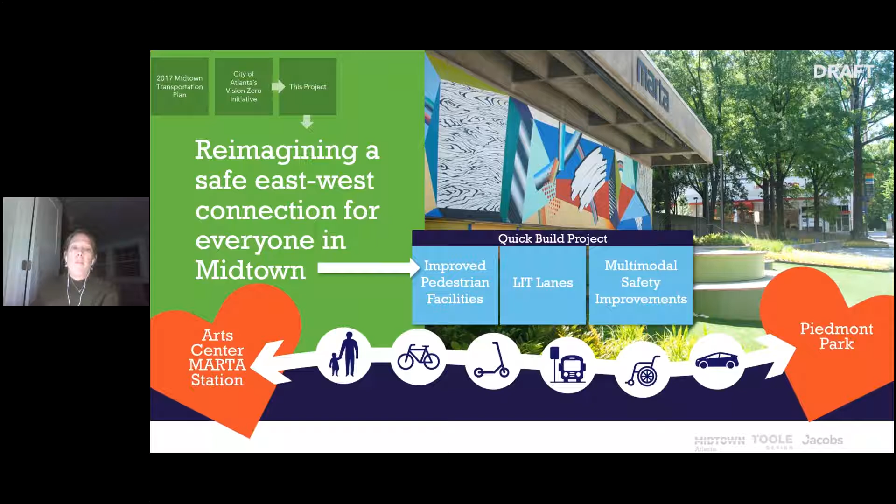Earlier this year, we were lucky enough for the City of Atlanta to adopt the Vision Zero legislation, which Carrie Byrne with the city will speak about momentarily. That is really to improve road safety, including lowering vehicle travel speeds in the city. So all that brings us to the 15th Street project. In short, this project aims to improve safety for all users, slow vehicle speeds, reduce vehicular congestion, and provide dedicated space for all modes.

And with that, I'm going to turn it over to Carrie Byrne. She is with the City of Atlanta, she's the Chief Bicycle Officer.

Hi, thank you, good evening. Thank you Julie and Addie. My name is Carrie Byrne, I'm the Chief Bicycle Officer, as Addie mentioned, with the Atlanta Department of Transportation. To give you some context on where the city is coming from as a newly formed Department of Transportation, safety is a critical focus of all of our transportation work. Data shows that traffic death rates in Atlanta are unacceptably high.

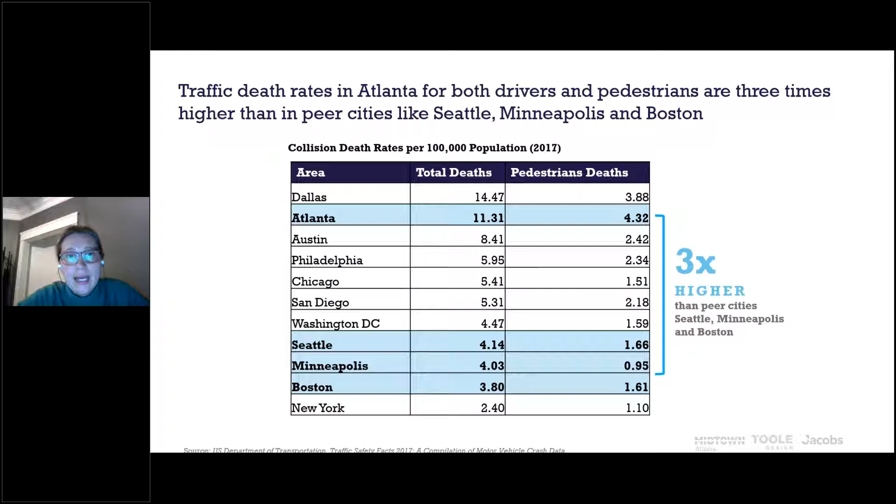In 2019, 73 people died trying to get where they were going. This is not something we should or need to accept as a city or as a department. Each of these is a tragic incident, and we need to strive to eliminate these.

With the recent creation of ATL DOT, our Atlanta Department of Transportation, and the development of the One Atlanta Strategic Transportation Plan, ATL DOT is committed to improving safety and making walking and biking a safer and more pleasant option for more Atlantans, all prioritizing safety, equity, and mobility.

In April, the City of Atlanta unanimously adopted a Vision Zero policy to eliminate traffic deaths and serious injuries. Along with that was legislation to lower speed limits on many of our city streets.

With that policy, Atlanta has joined 43 cities nationally who have adopted Vision Zero policies, peer cities that have implemented Vision Zero action plans that have shown meaningful reductions in traffic deaths. ATL DOT recently was awarded funding for creation of a Vision Zero action plan, and we're excited to get started on that work.

The 2019 Midtown Alliance Community Survey shows that the Midtown community members already support a lot of these goals around making and investing in a more walkable and bikeable community.

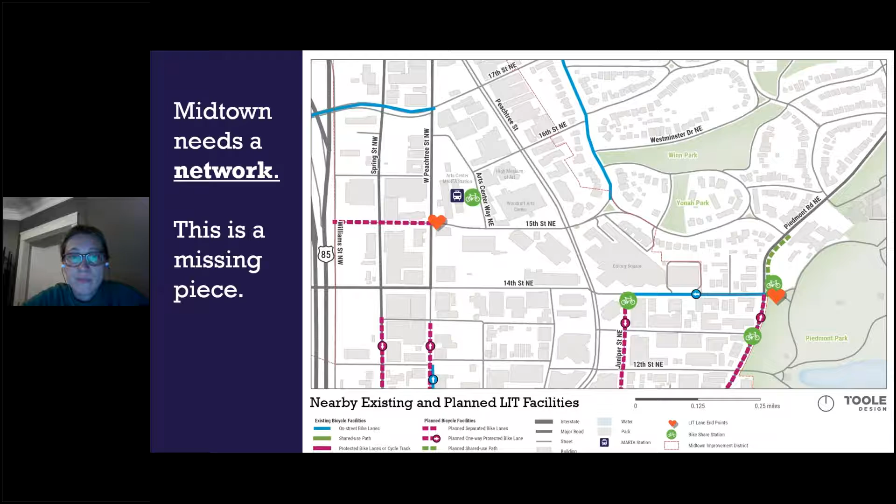To do that, we need to create a network. We have a series of bike lanes throughout Midtown and a growing investment, but in order to create a system that is bikeable and accessible to more users, we need to connect that network. This project that we're going to talk about tonight provides a key connection in that network.

And we're working on a lot of things. ATL DOT and Midtown Alliance have several projects that focus on safety improvements and expanding the bike network throughout Midtown. We're always excited to work with partners like Midtown Alliance who are able to support our transportation goals around safety, equity, and mobility while focusing on creating an expanded network that addresses safety for all users.

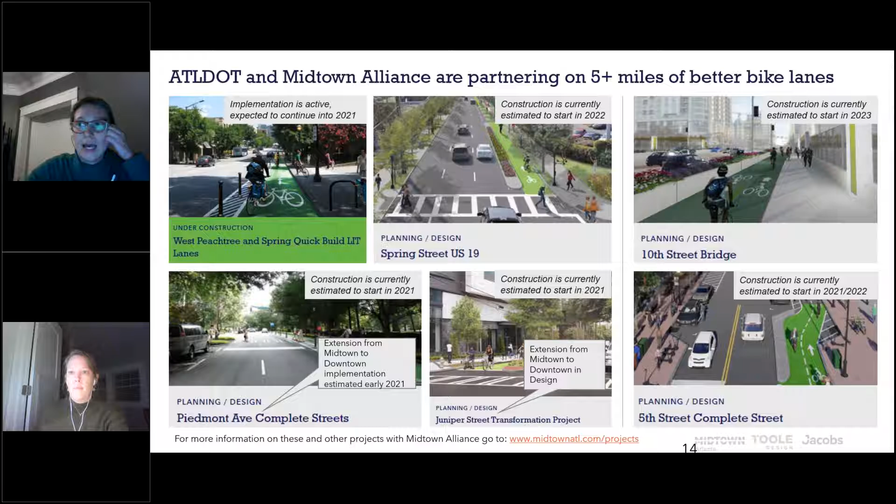I think through the conversation tonight, we'll see how looking at a bike infrastructure project can really address safety for all users of our streets, whether people are walking, biking, or driving. And with that, I think I'm turning it back to Addie to talk about the specifics of the project.

Great, thanks, Carrie. So this project aims to provide that east-west connection between the Arts Center MARTA Station and the Piedmont Park entrance at 14th Street, connecting to the Beltline.

As part of our initial focus area, while the 15th Street corridor was identified in that 2017 plan, we wanted to look at the alternatives both north and south and see if there was any viability in those. So we looked at the 14th Street corridor, we looked at 15th, and then we looked at 15th with a 16th Street leg that comes down to Arts Center Way. Megan McMullen will be speaking about that analysis in a moment.

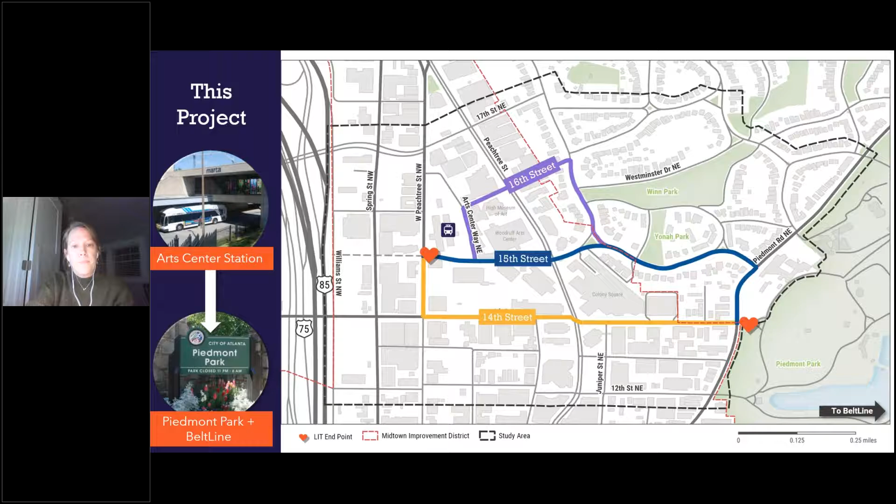As part of this effort, we're really looking at an agile infrastructure approach that really aims to reduce the amount of pre-construction. Midtown Alliance has a great partnership with the City of Atlanta, and so they're working closely with us on this effort. There's close partnerships we have.

We're also really focused on the entire corridor of providing these changes within curb to curb. So we really want to minimize acquisitions and curb and gutter. We're also looking at low-cost materials that can be easily upgraded as funding becomes available.

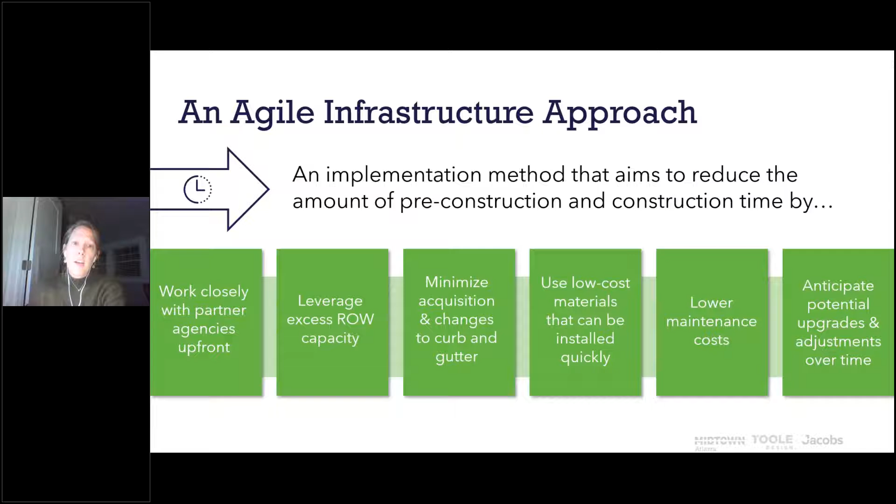So we began this project right at the beginning of April, and then since that time we have been going out to the community and stakeholders and doing a deep dive into the existing conditions. Currently we're in round 2 of community engagement.

From this effort, we will move on to schematic design. Once schematic design is complete, we will hand our work over to Midtown Alliance, where they will begin looking at how to actually secure funding. As of today, there is no funding allocated for this project, so there's a lot of steps that need to happen between the completion of this work and implementation.

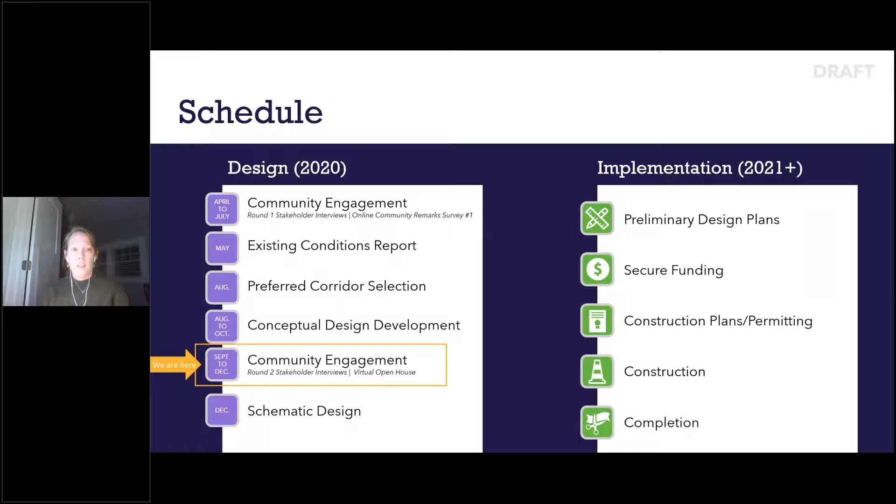As I mentioned earlier, we've done community outreach. We've spoken to a lot of key stakeholders in 2 rounds along the corridor. There are various key property owners that really have influence along the corridor. We had the community remarks online survey, and currently we're with the virtual open house. This is not the last time that you'll be able to weigh in on this project as it moves forward. There will be future phases of engagement. And with that, I'm going to turn it over to Megan McMullen, my colleague.

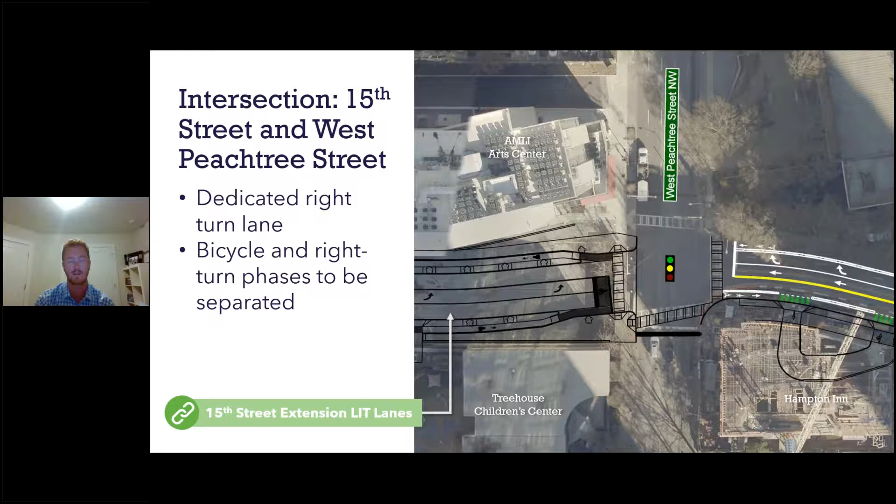And then I think we can get onto Arts Center Way next. Here, the existing is an unsignalized crosswalk. So we have three crosswalks on each leg of that intersection. What we're proposing is to introduce an RRFB on that west leg, but also add in an ADA accessible ramp to the south side of that, to make that RRFB and narrow that pedestrian crossing.

So as you can see, we've got refuge on both legs of those crossings on the south side, just to narrow that crossing and reduce that distance for pedestrians, and also facilitate a northbound turn for eastbound bikes onto Arts Center Way. And you can see with those icons the movement for each of those turns and the east-west.

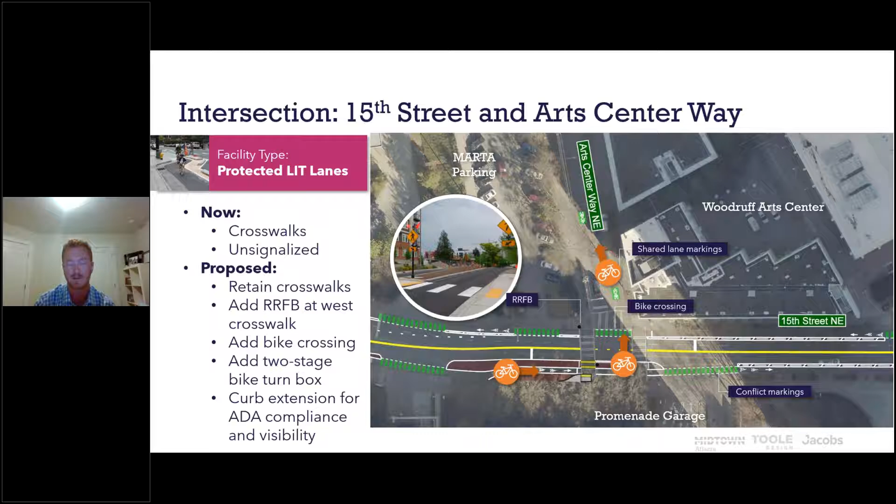So the next segment is Arts Center Way to Peachtree Street. And we've got for the westbound direction on the bike lanes, we have a MARTA bus stop, and we also on the south side have the loading bays to deal with. So the existing is one lane for eastbound and two lanes in the westbound direction.

So at the lane reallocation we're proposing, it's one lane in each direction with still the provision of a left turn lane at Peachtree Street itself. And then we've consolidated the existing loading bays to make that a little cleaner, and then also improve the sight distance as you approach the intersection for eastbound bike lane users.

And then, yeah, well, the icons to show those movements. And then also at the MARTA bus stop, we're proposing a constrained bus stop type where you have the lane itself ramp up to the bus to curb height. So we've got that shown there.

And the next intersection on that segment is one of our most constrained on the corridor, where we have pretty tight existing curb to curb width, but also some plaza. So we have some shared lane markings shown here, but we're proposing to ramp up to sidewalk level for both east-west directions as you approach the intersection, continuing to look to separate the bike lane users from the travel lanes as much as possible.

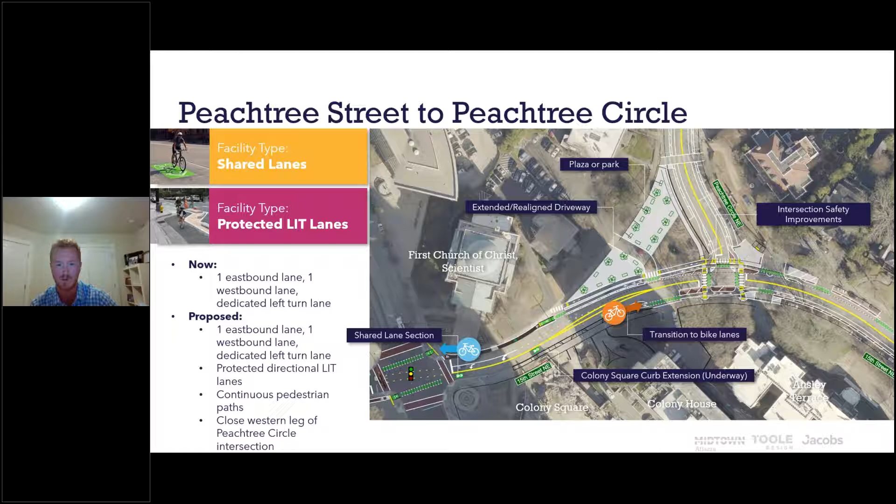The next one will zoom in more on the Peachtree Circle intersection to see that a little more clearly. We've looked at the safety data and proposed a 3-way stop and reallocating of the space on the west leg of this intersection. This is sort of an interim design, so there's a lot of potential to reallocate that space for reimagining and collaborating on coming up with something permanent in the future. This configuration also allows parking to remain along the leg of Peachtree Circle, but also realigning the driveways and adding a protected intersection and an in-street sidewalk or pedestrian lane for east-west movement. So we're really shortening that east-west movement distance for pedestrians, but also facilitating bicycle and bike lane movement north and south as well.

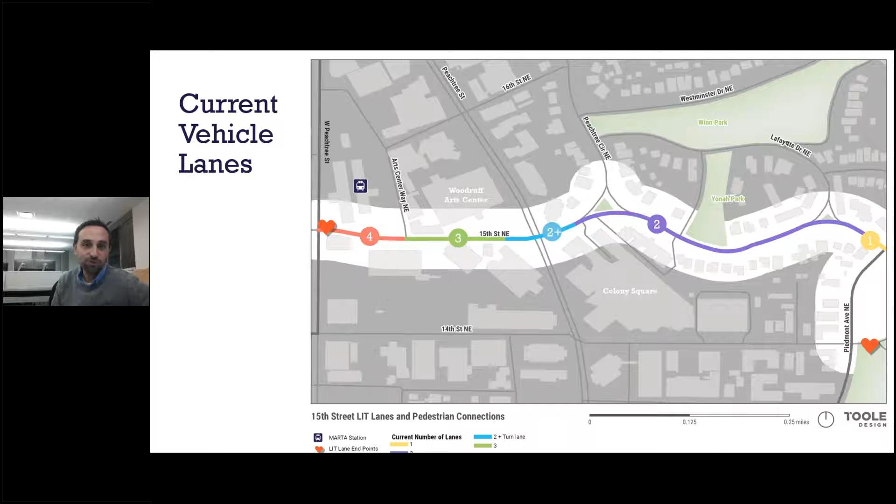The future lane configuration mostly maintains the number of lanes. As we approach West Peachtree Street, we are still maintaining 2 lanes on the 15th Street approach to West Peachtree Street, as we know that gets a little congested during the afternoon peak period. We also maintain the number of lanes going across Peachtree Street, which is another pinch point along the corridor, and we maintain those 2 travel lanes through Ansley Park.

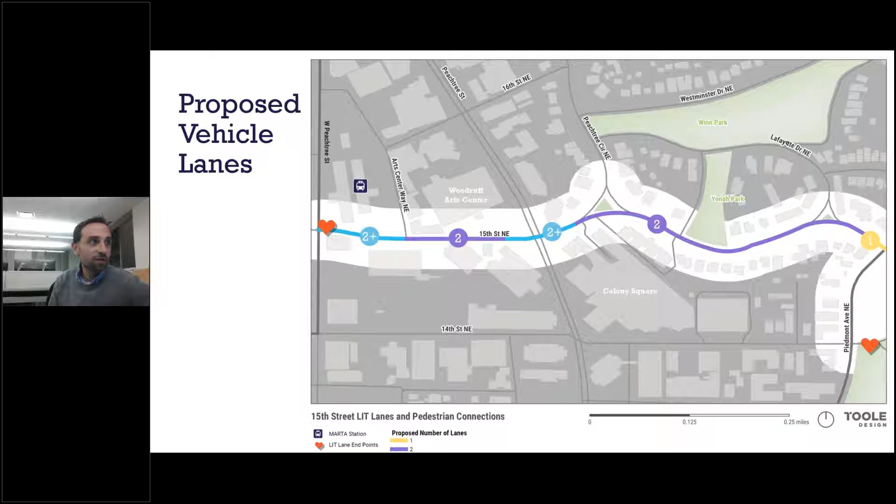Go to this slide. Here we have the most congested part of the 15th Street corridor, the Peachtree Street intersection. We understand today there's some afternoon queuing on the westbound approach, some delay. Sometimes it blocks the access points to Colony House, Hanover House, and Colony Square. Also highlighted by Megan earlier in the presentation, the Peachtree Circle intersection with 15th Street is an area that has a lot of crashes. In the years 2016 through 2018, our query indicated there were 17 crashes at this location, with 3 injuries, and 6 of those crashes were actually angle crashes, which are some serious crash types.

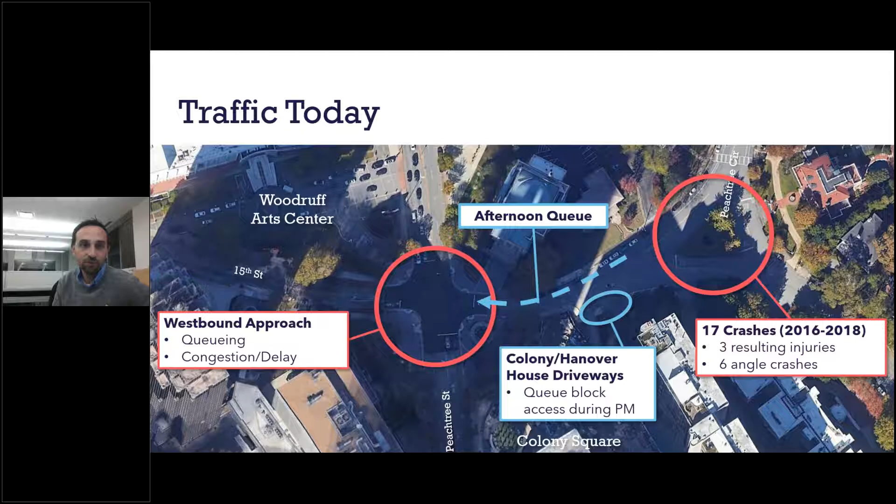Looking into the concept, how we address and mitigate some of the concerns. Crossing Peachtree Street, we're maintaining the same number of lanes, so we're not going to introduce any more pinch points or bottlenecks at this location. In fact, we've identified a way to improve traffic at this area, even though it wasn't a goal of this project, since it's a road diet design project. We identified an opportunity to add a left turn phase to improve congestion on that westbound approach, so we should expect shorter queuing as westbound left turning vehicles now have a protected movement across the intersection.

We're also introducing a three-way stop at the intersection with Peachtree Circle. The reason I pointed out there were 6 angle collisions is that it's a collision type correctable by installing an all-way stop sign. So we should expect improved safety at this intersection, not just for cyclists and pedestrians but also vehicles, and we can ensure a protected pedestrian and bicycle crossing. By shifting this intersection away from Peachtree Street, we're separating the two intersection operations, providing more space between them, which should improve safety between the two intersections as well.

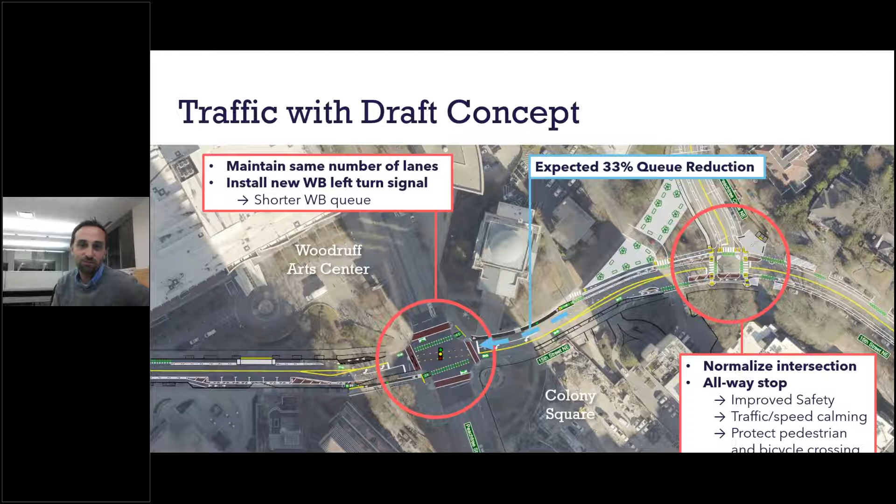Megan, were you going to discuss these slides? No, sorry Chris, I'm taking over from you.

Thanks for that. We've gone over a lot at a high level, lots to digest here, but there's no one perfect route. We understand some pull toward 14th or 16th, but after reviewing all of the options, some really clear benefits to going along 15th Street bubbled up.

Not only will we be able to connect a couple of other projects that are in the works, Piedmont and the 15th Street extension, but we're also going to create a safe designated space for cyclists and scooter riders along 15th Street. We're going to improve pedestrian safety. A simplified intersection at Peachtree Circle will really reduce the conflicts we see and improve everyone's safety.

The other thing that will really benefit this area is that right now, with such wide lanes, we see high speeds going through Ansley Park. So in addition to reducing the width of those lanes just a little bit and adding a 3-way stop, we'll be able to slow traffic just a little to make it more safe for the neighborhood.

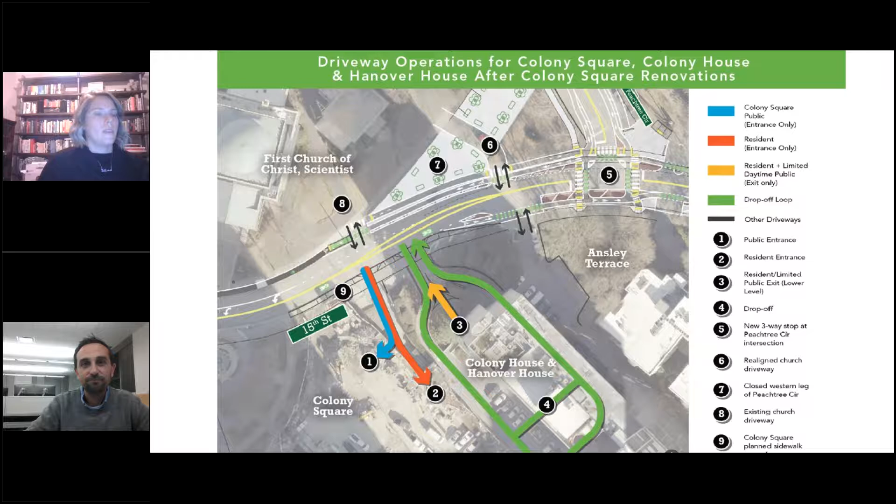Excellent, thanks Chris. I do think it might be important to mention as well that while we are trying to do everything we can to make the entrance and egress from Colony and Hanover House and Colony Square as safe as possible, we are of course limited to improvements along the right of way. So the scope of this project, we can't really change the way that traffic flows inside the building, because that is definitely beyond what we are in charge of.

So another question was, what prevents people from riding down 15th Street as it stands today, especially in terms of thinking through fund allocation.

We're really approaching a lot of these safe facilities with this 8 to 80 concept. So we want to make sure that any kind of thing that we designate as a corridor can accommodate folks across a spectrum of comforts. While of course any street in Atlanta is accessible and available to people on bikes and scooters, that doesn't necessarily mean that everybody feels safe. So in creating these projects, we are working to create corridors and connections that accommodate everybody. Whether you're someone riding with a 2-year-old on the back of your bike or a first-time rider, we want to make sure that you feel safe and separated from vehicular traffic, which is a major barrier to people using other modes of transportation besides cars.

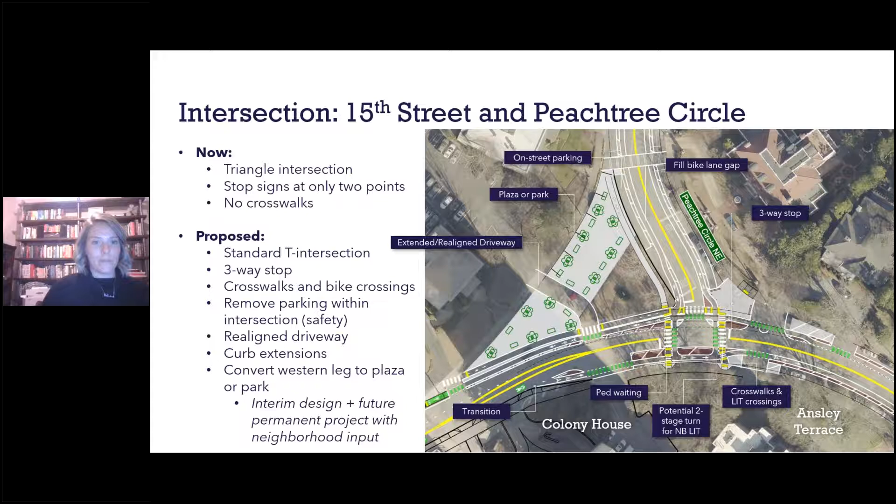Sorry, everybody. Apologies, I lost my spot.

So we've got another question about maintaining on-street parking when we're trying to move away from a more parking-focused model in Atlanta. If we took away parking, we could have a larger bike lane facility. While that's true, and there is ample parking in the area, including Colony Square and surrounding Ansley Park, we always want to weigh the needs and concerns of everybody who lives in the area and uses these facilities. During our stakeholder engagement, we heard that maintaining parking throughout Ansley Park is really important to the neighbors who live there currently, so we want to respect and balance everybody's needs. That's why we tried to work towards putting the bike lane down 15th Street, but also really listening to what the community wanted there.

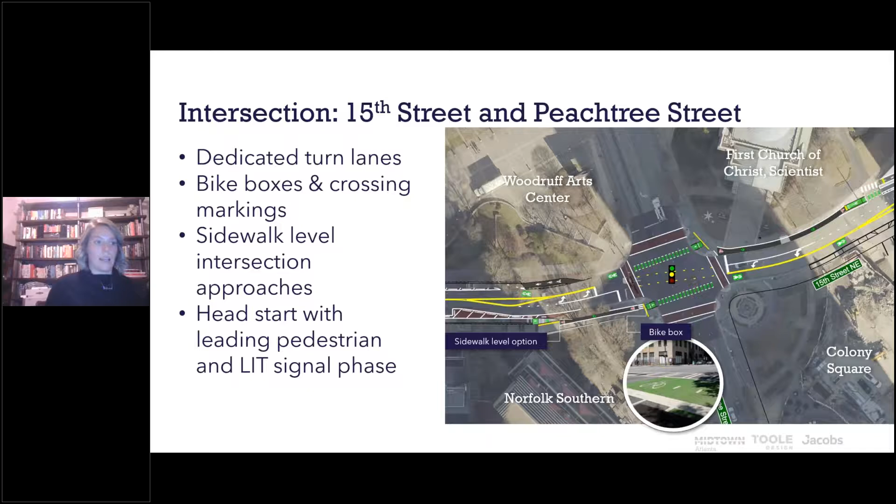As a frequent pedestrian who lives at Hanover House, there are concerns about 15th Street and crossing Peachtree with vehicles and those conflicts. As we mentioned earlier, having that leading pedestrian interval is going to really help out, and hopefully that signal optimization will help as you get a head start from the cars to walk across.

Any plans to provide safer access from 15th Street across Piedmont for access to Piedmont Park and the Botanical Gardens? Is it Addie or Megan? Do we have any kind of zoom in of that area? Yeah, if either one of you want to speak to that.

That project luckily is something that has already been in the works. So you'll be seeing that improvement fairly soon. If anyone is interested, head to the Midtown Alliance website. There's a project for the Piedmont Avenue Complete Street, going from Ponce de Leon north up to our project. Where you see this orange bicycle, it's not drawn in, but it will be added between these stops, with a new crossing to bring attention to cyclists crossing on the shared use path. That's not part of this project, but is already being addressed, and they're getting ready to move into construction fairly soon.

Yeah, excellent. I think that's another reason why 15th Street really bubbled up as our preferred corridor, because there's that existing connection on Piedmont that flows really nicely in here. Yeah, worked really well.

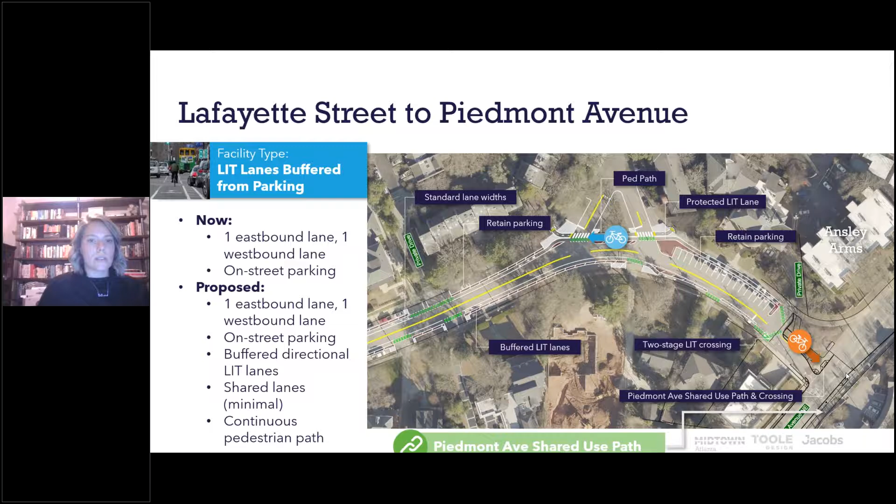Chris, I'm not sure if we studied actual speeds along 15th Street through Ansley Park, but do we have any projections for speed reduction as a result of this project?

We did collect some speed data as part of this project. However, the sample size was very low, so it wasn't statistically significant, since we collected this data back in April when everything was sort of closed down. So there's no projections of speed. However, in the areas where we're narrowing the roadway, previous studies have suggested that when you narrow the roadway, vehicle speeds do drop. That's more during off-peak times when there's less traffic and nothing impeding speed, so the narrower roadway should reduce travel speeds.

We have a question about whether we've analyzed if bikes, scooters, and pedestrians will have enough time during that signalized lead at 15th and Peachtree to complete their motion across the intersection.

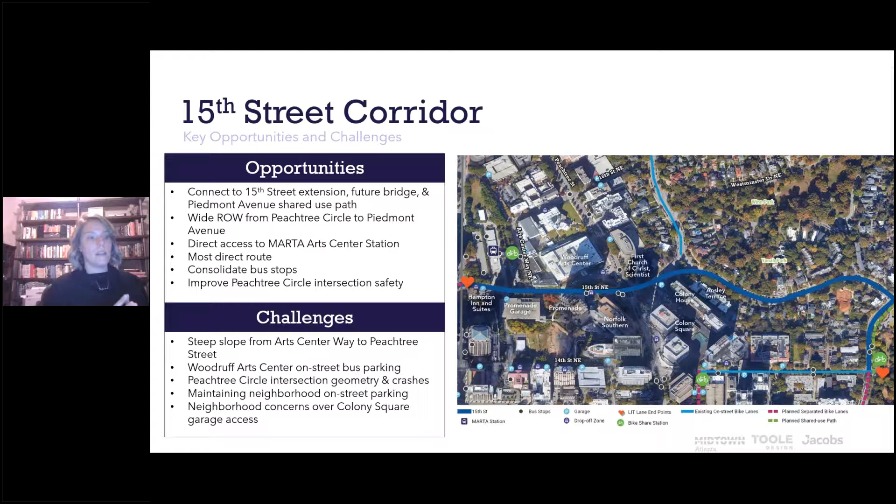We've got a question about why a lit lane would be necessary through Ansley Park, given that it's a residential neighborhood. If you look at the whole plan, 15th Street contains a chunk of Ansley Park, but there's also Colony Square, Woodruff Arts Center, and properties on the south side that Cousins owns, where Norfolk Southern used to be. They're redesigning that area, which will fill up with a new hotel, a MARTA center, and as we extend 15th Street in an upcoming project, a number of other commercial and business spaces will open up. This is really going to become a vibrant corridor, so we want to make sure we're creating accommodating connections for folks. That's why the lit lane is necessary through that segment.

Did the team consider 15th to Peachtree to 14th as an option? We really considered all options. We linked our existing conditions report, it's in your control panel, and there's a shorter version on our website. If you review the existing conditions report, it really goes into why 15th Street bubbled up as our preferred corridor.

Tom, Megan, or Addie, we have so many delivery trucks pull up onto street curbs. What does this plan do to prevent that?

Addie, go ahead, we'll turn it over to you. We've spoken with Cousins and particularly kept the loading and unloading that is happening along the south side of 15th Street. We've also been in discussion with Woodruff Arts Center to understand how their operations are going, so the design reflects discussions we've had with both those key property owners who have a lot of loading and unloading happening, including the Hampton Inn.

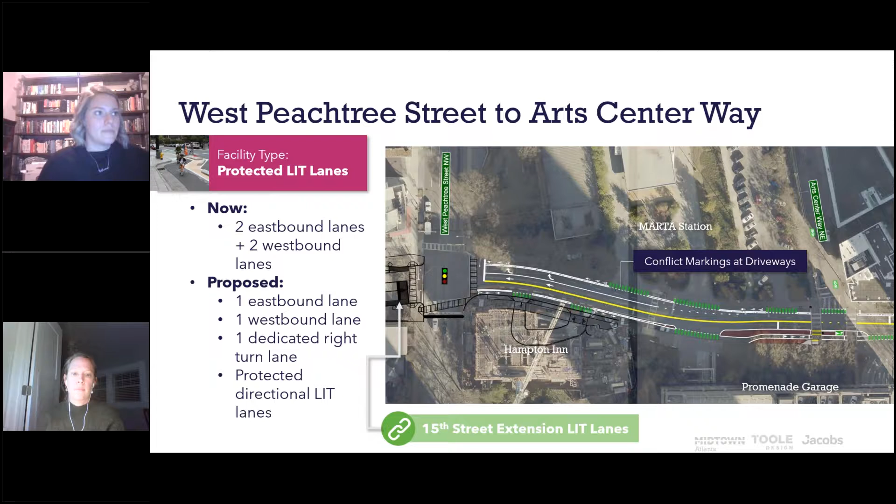Thanks, yeah, I think that's definitely a practice we see throughout the district that we're really working to address in a number of places.

Great question. Another jargon question, and I apologize - constrained style stops, referencing back to the MARTA stop at the top of 15th Street. Basically what that means is you've got a ramp that will get folks from the MARTA bus stop onto the sidewalk so the bus doesn't actually have to pull into the lane. By law, MARTA is required to pull all the way over to the curb for ADA accommodation, so this constrained stop allows them to stay in the vehicular traffic lane and still provide safe entrance and egress from the bus.

There's a lot of questions popping up about Piedmont. I don't want to take up time because we're talking about 15th Street right now, but I do want to let y'all know there's quite a bit of information about the Piedmont Avenue plan on our website. Please head over to Midtown ATL for tons of great information and some great renderings. We're really excited about that project.

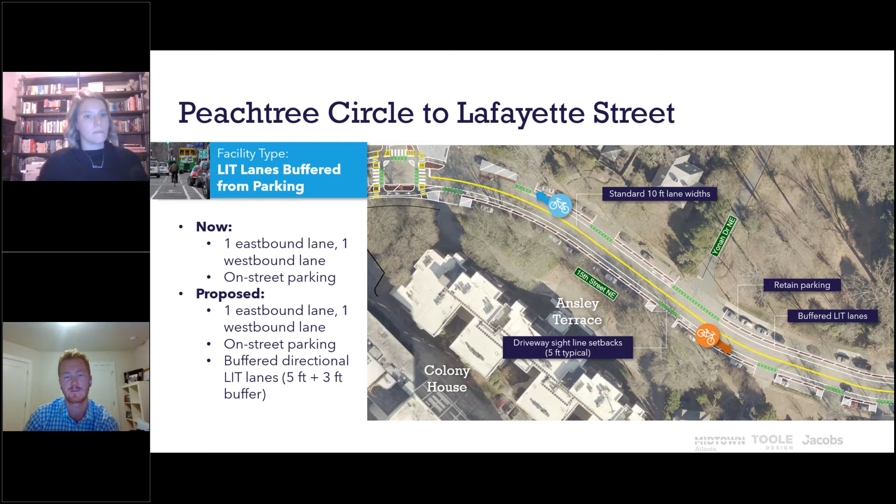And then a question for Tom: is there a solid line or double line down the middle of 15th Street in Ansley? That'd be a double yellow line. The graphic just appears that it's a single, but it'll be a double yellow line, like standard. Thanks, Tom.